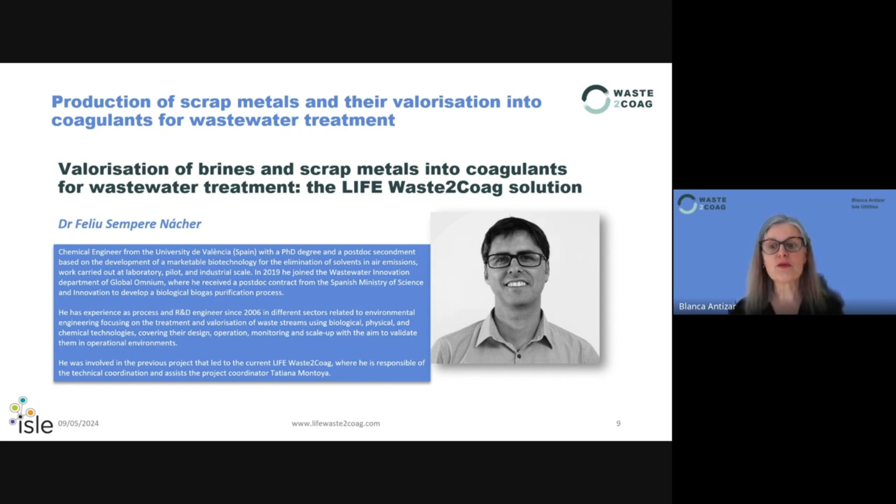Our next presenter is going to be Dr. Feliu Sempere. He is a chemical engineer with very prestigious academic credentials and international experience, and also expertise in waste treatment and biogas purification. He joined Global Omnium in 2019, and since then he has been involved in many interesting projects, which has led to this project today, the LIFE Waste2Coag. He's leading the technical coordination of the project at Global Omnium, and assists the project coordinator, Tatiana Montoya. So now Feliu is going to provide us an overview of the project and latest advances. Thank you, Feliu. The floor is yours.

Thank you, Blanca. Hello, everyone. Do you see my presentation? Okay. Not yet. Not yet. Now we see it. Yeah. Now? Okay, yeah. Perfect.

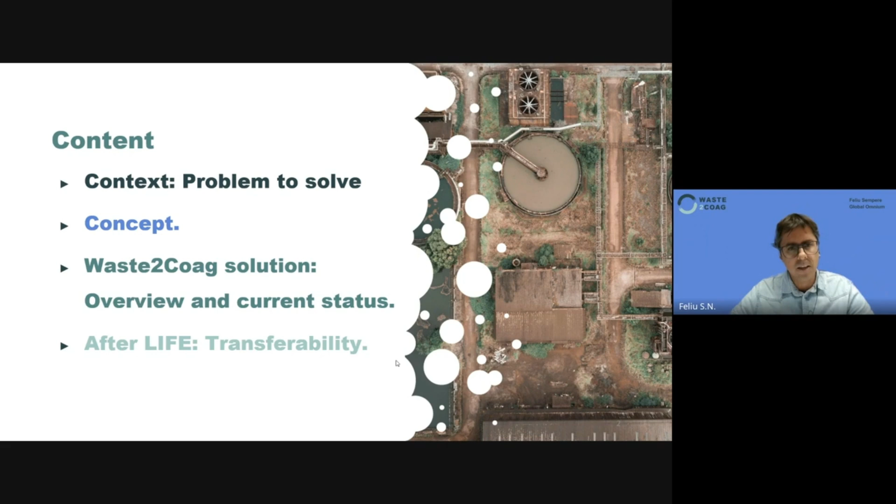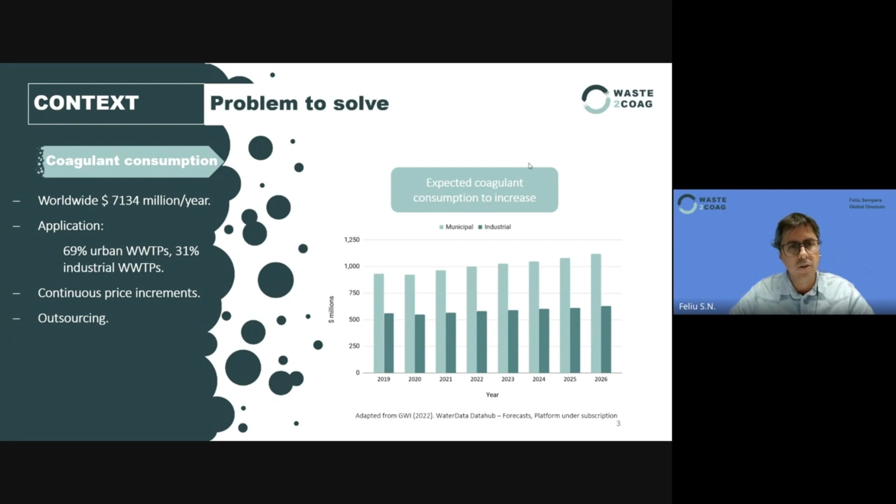Okay, this is the content. I will start with the context, the concept of the Waste2Coag solution, an overview of current status, and also the after LIFE transferability. Okay, the context is the problem to solve. We have a high worldwide coagulant consumption, which is applied mostly in urban wastewater treatment plants, but also for industrial wastewater treatment. There is a continuous price increase, and normally we have to outsource this; indeed, for example, in the UK, coagulants have been defined as critical goods for industry. And coagulant consumption is expected to keep increasing, also due to more stringent regulation on final effluent values in wastewater treatment plants.

Also, there is a huge brine disposal from desalination plants, 142 million cubic meters per day, but all other industries also produce brines. Of these brines, 80% of the production is released within 10 kilometers of saline water bodies, but 15% of this production is also away from saline water bodies, which makes its handling difficult, mainly in China, USA, and Spain. And the release of these brines, regardless of where they are released, poses an environmental impact on the receiving bodies.

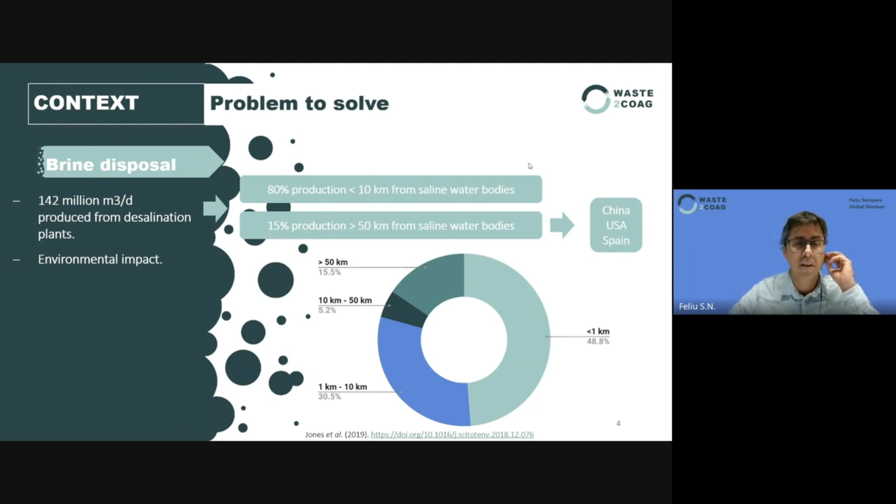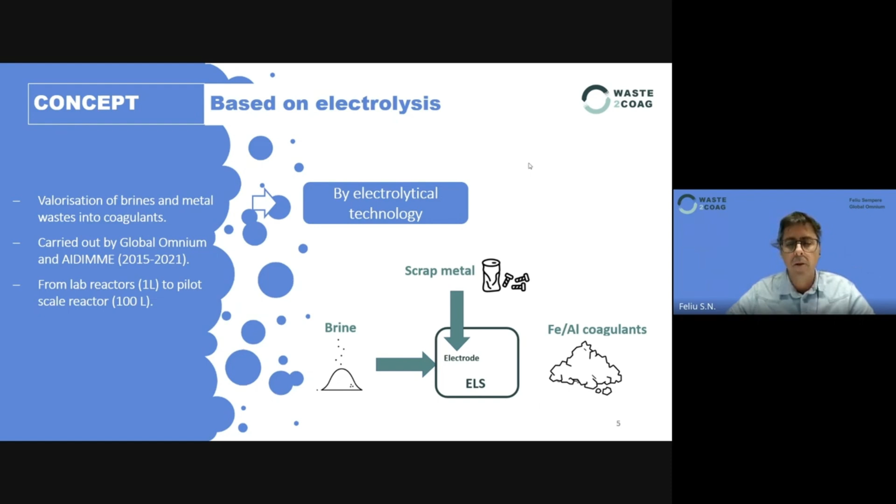So our concept of the project is based on electrolysis with the valorization of both wastes, brines and metal wastes, into coagulants. This was carried out by AIDIMME and Global Omnium since 2015, from laboratory reactors to pilot scale reactors of 100 liters, which was the previous project, using an electrolytic technology to produce iron and aluminum-based coagulants. Electrolysis is about applying a continuous electrical current to two metal electrodes to cause a non-spontaneous chemical change. If we use a sacrificial electrode as an anode, steel or aluminum, we are producing the substitute of iron-based coagulants or aluminum-based coagulants like PAC.

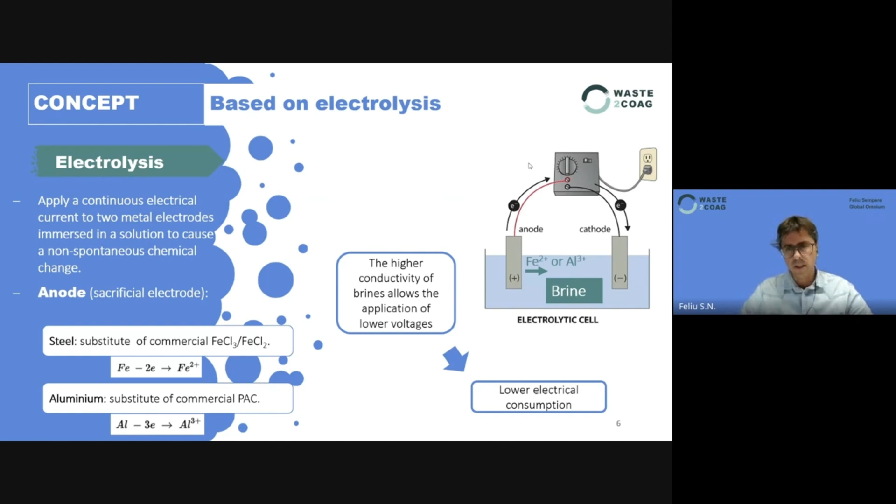Why are we using brines? We are using brines because the higher conductivity of these solutions allows us to apply lower voltages, which implies a lower electrical consumption in producing these coagulants. And this led us to the current project, with a total amount of 1.5 million euros, co-financed by the European Commission under the LIFE program. The project finishes, after an extension requested and approved, in September next year.

And we have AIDIMME, Joviar as partner for the industrial wastewater treatment plant, ISLE, who is organizing this webinar, Aquafin, a water utility in Belgium, and Global Omnium, also a water utility.

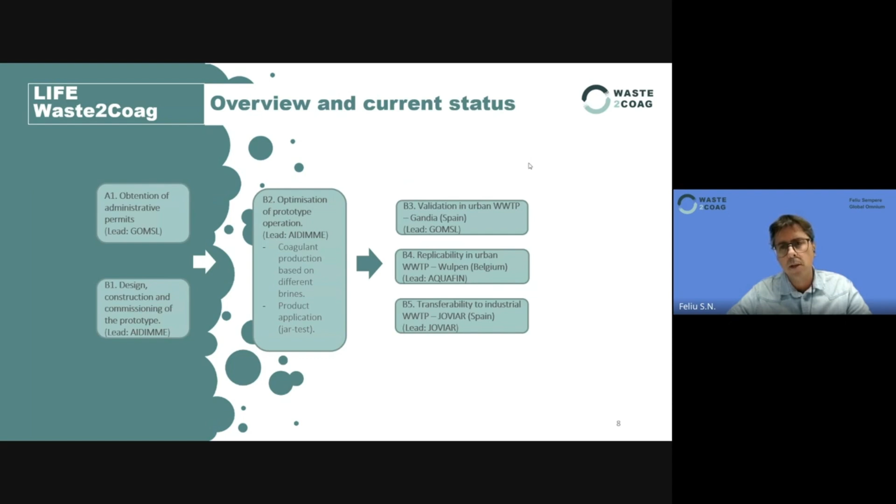Summarizing the project, the work packages are the obtention of administrative permits, the design and construction of the prototype, which was led by AIDIMME, the optimization of the prototype operation to produce the coagulants, and their application in wastewater treatment, an action that just finished. And then the validation of these coagulants in urban wastewater treatment plants in Spain and Belgium, and also in an industrial wastewater treatment plant at Joviar, in Spain.

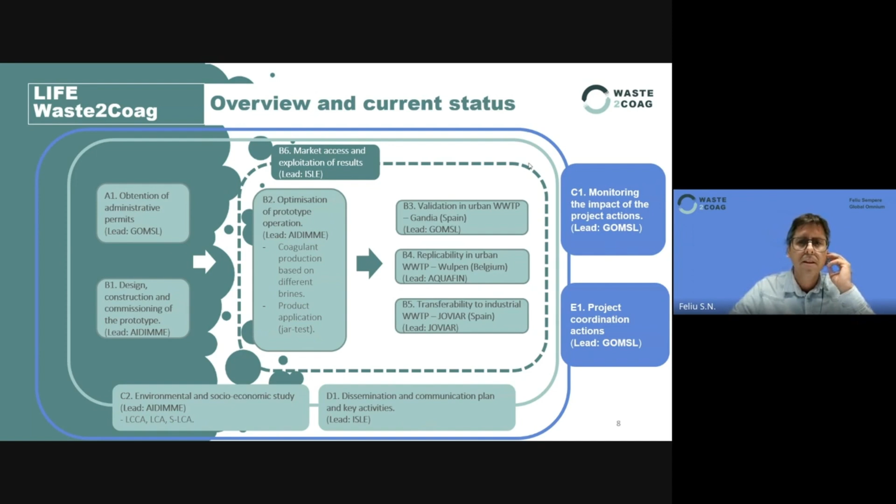ISLE is leading the market access and exploitation of results, and also we have as an action the environmental and socioeconomical studies of the solution, the dissemination activities, and finally, monitoring the impact of the project, and of course, the coordination of it. Nowadays, we are in action B5, the transferability of the industrial plant in Joviar.

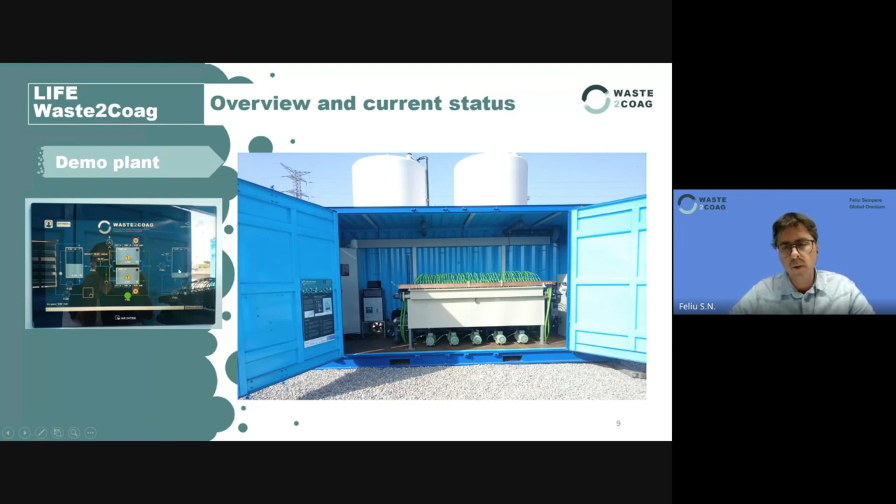Here you can see a picture of the HMI of the plant, with schematics of the process: the receiving tank for the brines, the electrolytic reactors, which we see here in the picture on the right side, and then a receiving tank of the coagulants from where they are dosed to the wastewater, industrial or urban wastewater.

We have 3 demo sites: 2 urban wastewater treatment plants with different brine characteristics and from different origins, and also an industrial wastewater treatment plant to transfer the results to a totally different type of wastewater, and also dealing with a different amount and conductivity of the brines produced, which are in the same factory.

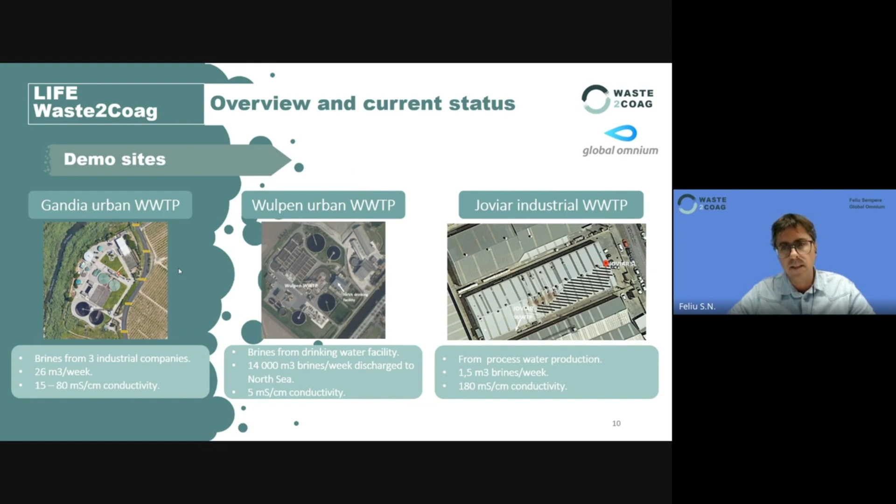As a result, we checked the purity of the scrap metals used as electrodes, and they were compared to commercial electrodes. And what we saw is that the purity of these metals was very high, with, in the case of aluminium, about 96% aluminium content, and in the case of iron, almost 100% content.

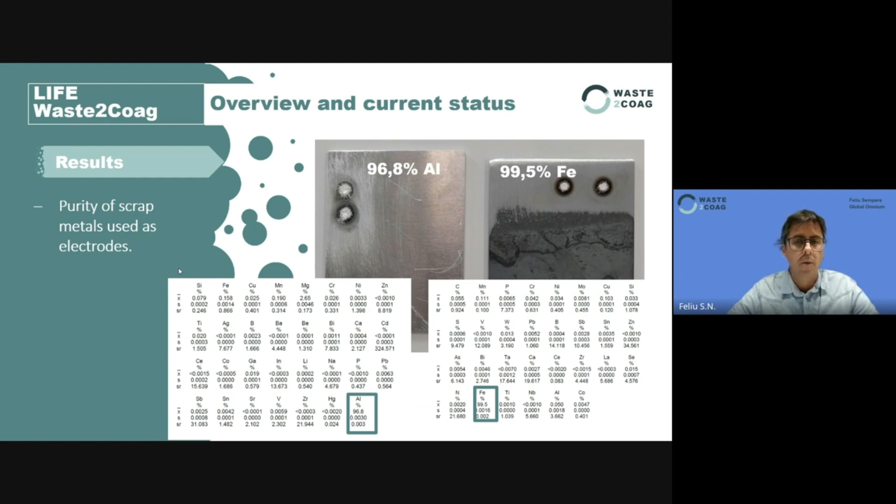In the production of the coagulants, what I would like to highlight is that on the left, we have the results of previous R&D projects. Based on the concentration of coagulants, we reached 200 milligrams of aluminum per liter, and now in this project, at different electrolysis time, we increase them to 1 gram per liter, which increases the valorization of brines. Let's say for the same amount of brine, we can produce more coagulant.

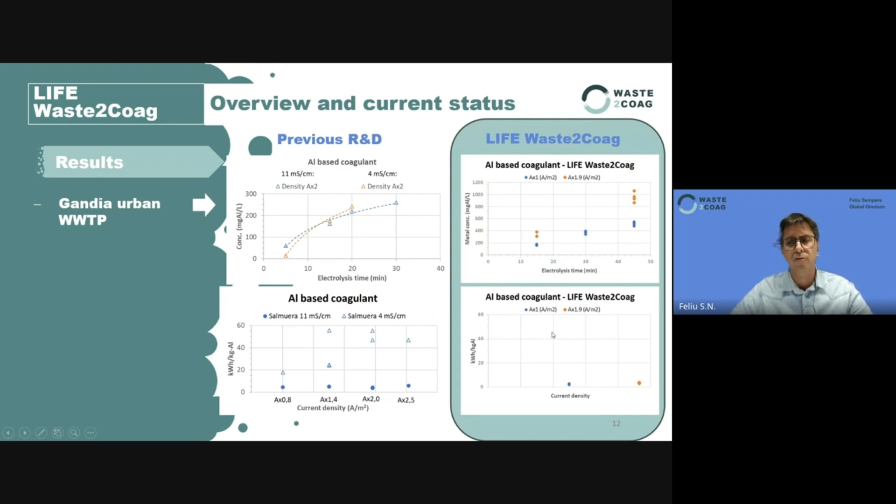And this is done using a lower energy consumption per kilogram of metal, compared also to previous projects where we have values as high as 60 kilowatt hour per kilogram of aluminum. And this is a result of the high conductivity of brines that we are treating in this project.

And then we also evaluated the toxicity of these coagulants, which we have in this slide, with respirometry tests, both on autotrophic bacteria responsible for nitrification, but also on heterotrophic bacteria. We made respirometry trials with activated sludge to evaluate the oxygen consumption, and also activated sludge with the alternative coagulants which we are producing.

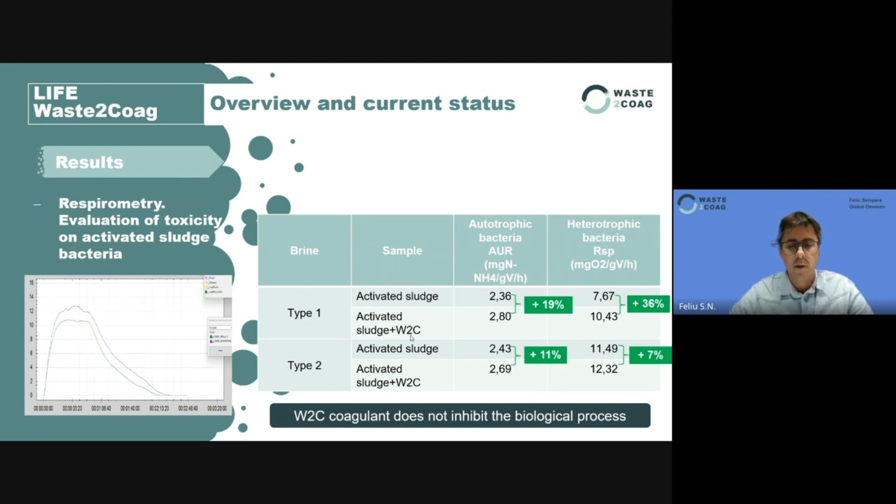And what we saw is that there is indeed a boosting of the respirometry in both types of bacteria. The objective is not to boost respirometry, but to check if there was any inhibition on the biological process, and these results clearly demonstrate that they are safe to be applied in biological reactors, such as those used in urban wastewater treatment plants.

And then, looking forward towards after the end of the project, we are looking for transferability, to test different types of brines, to be able to process them initially maybe at laboratory scale and afterwards in the demo plant, and also to apply our coagulants to other, different types of wastewater.

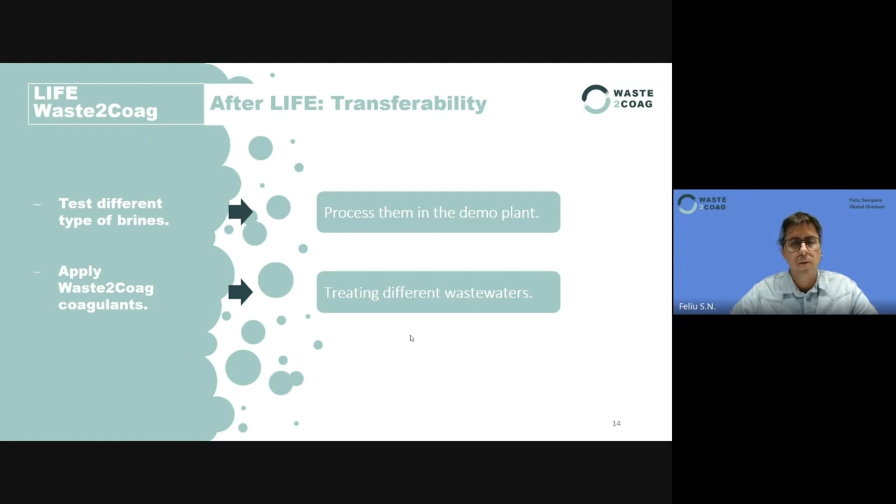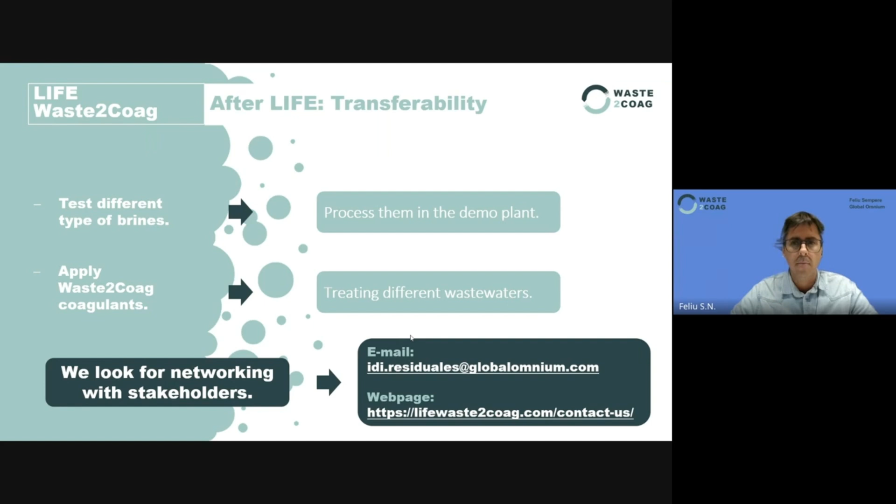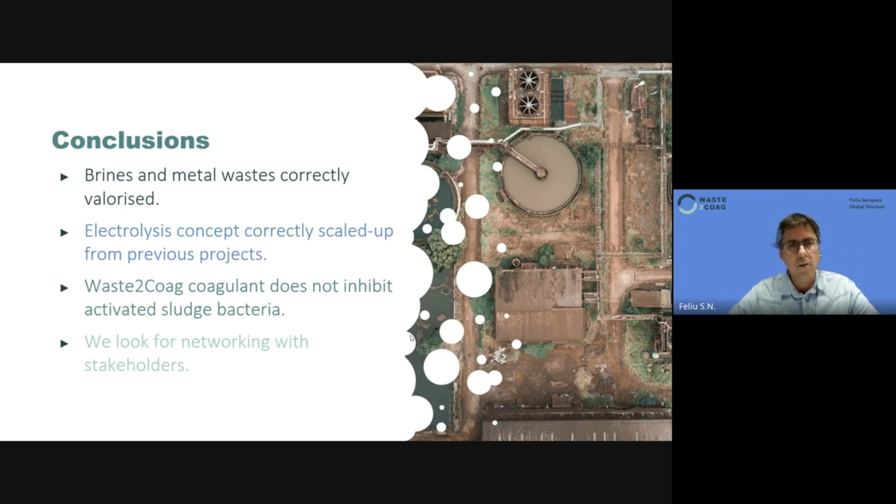So just to finalize, the conclusions: the brines and metal wastes are correctly valorized. The electrolysis concept has been correctly scaled up from previous projects. And these coagulants are safe to be applied on activated sludge reactors. And we look for networking with other stakeholders.